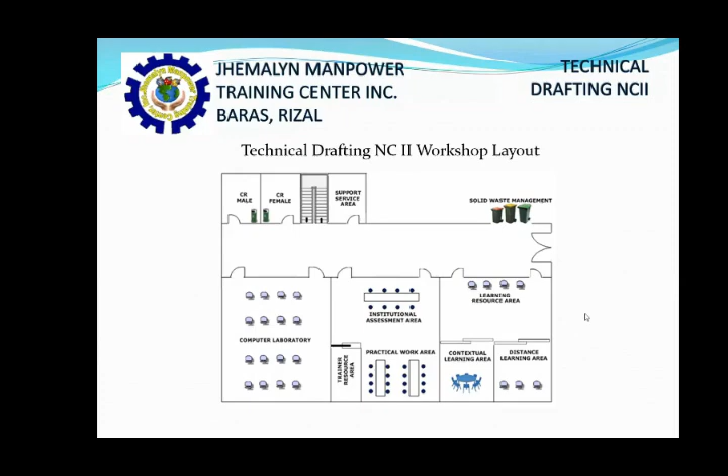At the end of the hallway is the learning resource area, where basically all the resources are, as well as the contextual learning area and the distance learning area for our knowledge-based learning.

So here under TESDA and Jhemalyn Manpower Training Center, as well as the Technical Drafting NC2 course, we use a training delivery of what we call competency-based training. It is an approach that focuses on the competency development of the learner as the result of the training.

So why do we use competency-based training? Because education and training must keep pace with the current technology and customer requirements. So under CBT, we have 10 principles.

Firstly, the training is based on the curriculum developed from the competency standards. So basically, everything that we're going to use or learn here is from what we call the competency standards written by TESDA. Next, learning is competency-based or modular in structure.

So basically, you will be learning one module at a time, and sometimes there are particular modules that have a prerequisite. So you have to be able to do or learn the previous module in order for you to move on to the next.

Number 3, training delivery is individualized and self-paced. Here at competency-based training, we believe the competency development of the learner as the result of the training should be individualized.

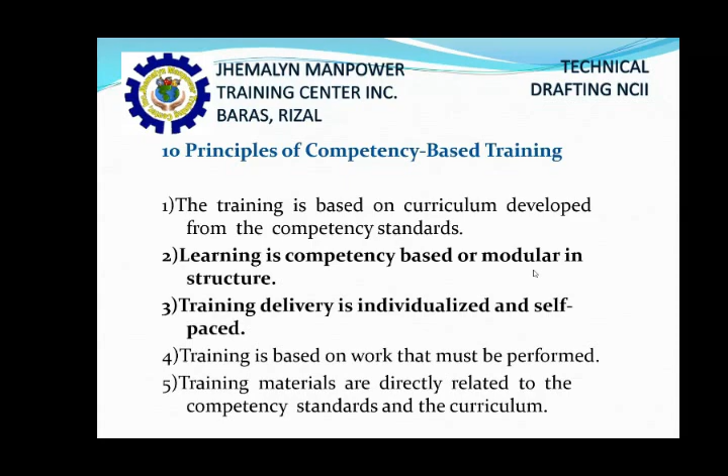So we will cover all of the competency standards that you will be needing in order for you to become competent on Technical Drafting NC2. Number 6, assessment of learners is based on the collection of evidences of work performance based on industry or organizational required standards.

So you will be assessed according to your personal development with regards to the training, the Technical Drafting NC2. You will be assessed based on your current work performance as well as your current development and competence with regards to the training.

Number 7, training is based on and off the job components. So basically, it will be better for you to have an industry immersion of what technical drafting NC2 really is about. Number 8, the system allows recognition of prior learning.

I will assume that some of you have previous learning or competence with regards to technical drafting NC2, especially since this course is divided into two very different aspects or styles on how to produce technical drafting drawings: how to do it manually and how to do it using computer-aided design.

Number 9, the system allows for learners to enter and exit programs at different times and levels and to receive an award for competencies attained at any point. This is in correlation with principle number 3, that the training is individualized and self-paced. Meaning to say, you will be receiving an award for competencies that you are deemed competent enough in, as well as there being flexibility in our training.

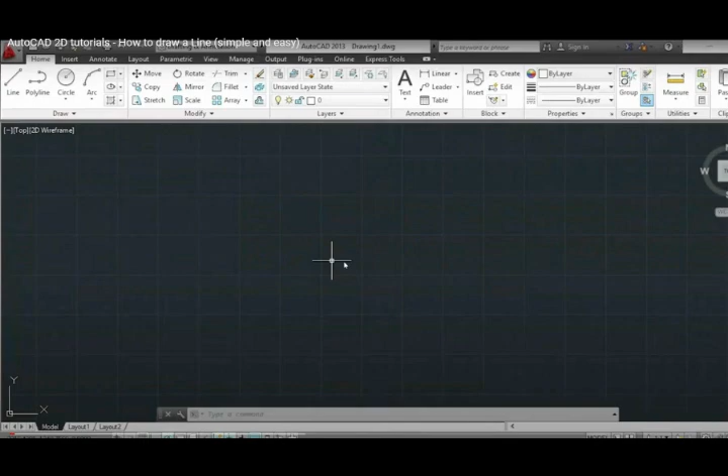Okay, so we will be continuing the presentation on drawing basic geometry. We will proceed on the lecture.

So first, let's draw a line. Remember that AutoCAD recognizes an object by its coordinates. There are three types of coordinates or axes in a three-dimensional setting: the x-axis, the y-axis, and the z-axis. You will be given 2 points on a 2D setting for you to be able

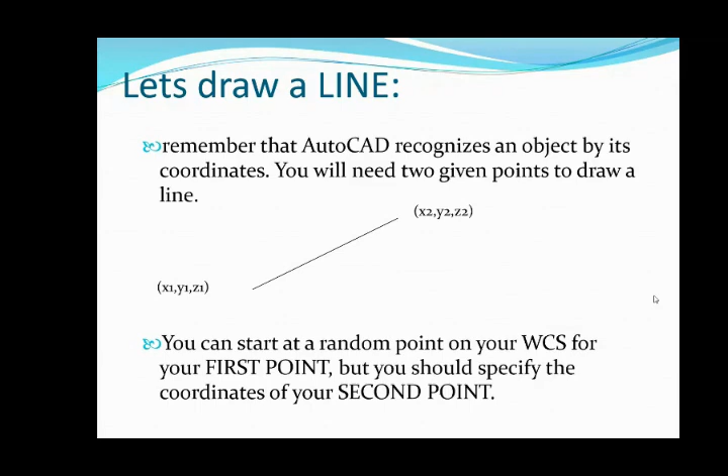to draw a line. So basically, a line is a distance between 2 points. You start a random point on your WCS for your first point, but you should specify the coordinates of your second point. You will type the line command on your command window, or you may click on the line icon on the draw toolbar, or select line on the draw menu.

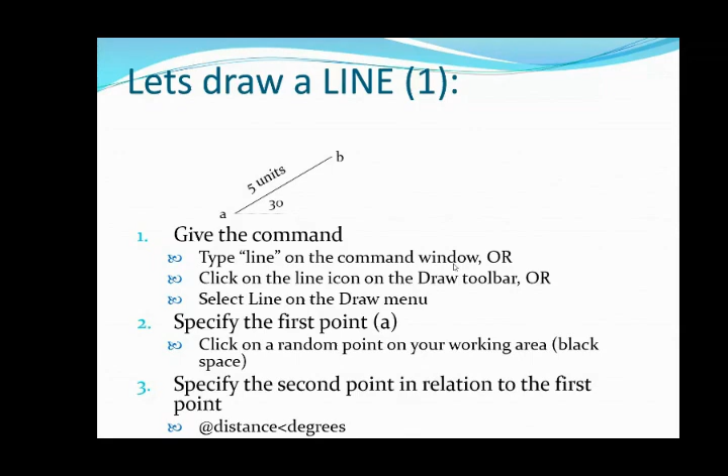Next is to specify the first point and the second point. If you want to do an orthographic line, which is restricted into horizontal and vertical, you have to hit F8, function 8, to have orthographic mode on.

You can give the command, specify the first point, and specify the distance between the 2 points, in relation to the first point. So if you want to do it 7 units, you have to type 7.

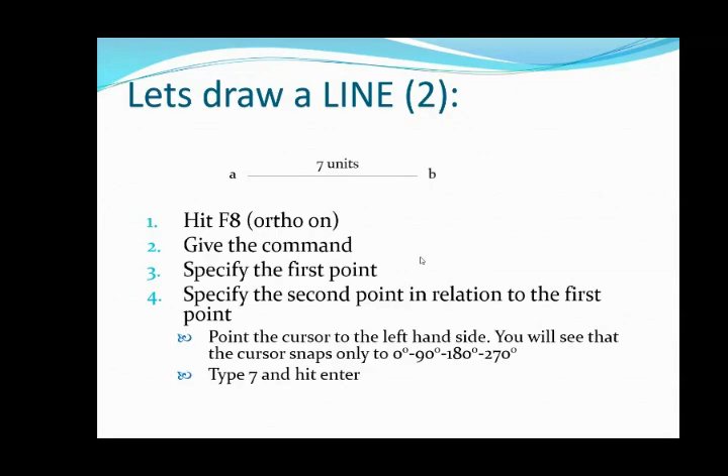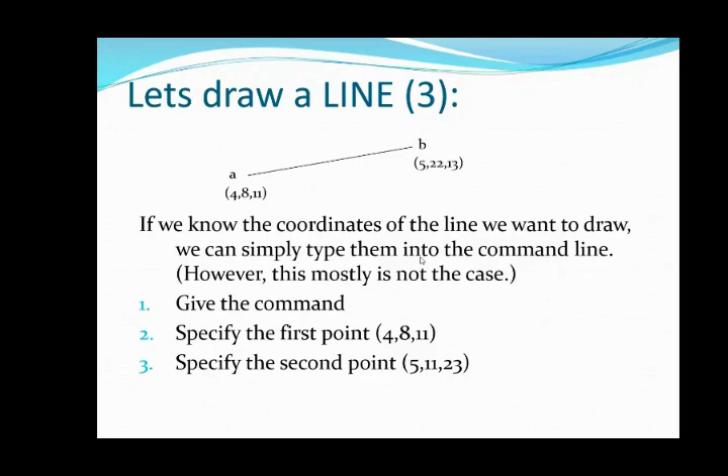If we know the coordinates of the line we want to draw, we can simply type into the command line. However, this mostly is not the case, so you will type the line command and specify the coordinates, like 4,8,11 and 5,11,23, for example.

Aside from line, we have different shapes or objects that we want to use in order to represent more in the drawing, because that's the very point of AutoCAD. Computer aided design and drafting is basically a representation of the actual manuals in order for you to design or build a building or a structure.

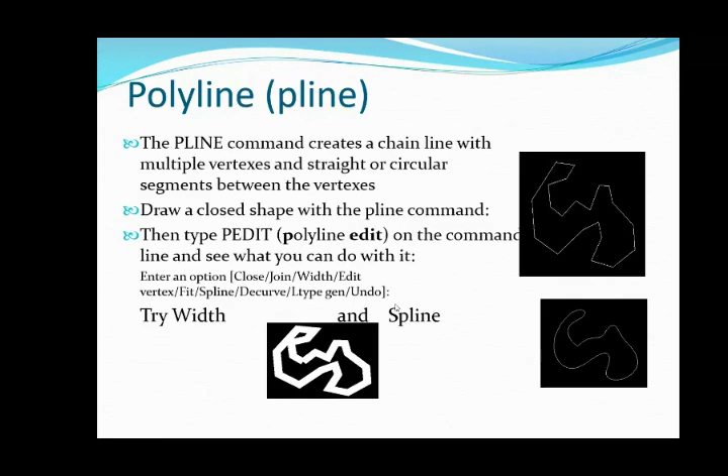ponds, pools, etc. Hatching is basically filling up a certain enclosed space. You may select what types of hatches an enclosed space or an object should have, since there are particular types of hatches for particular materials.

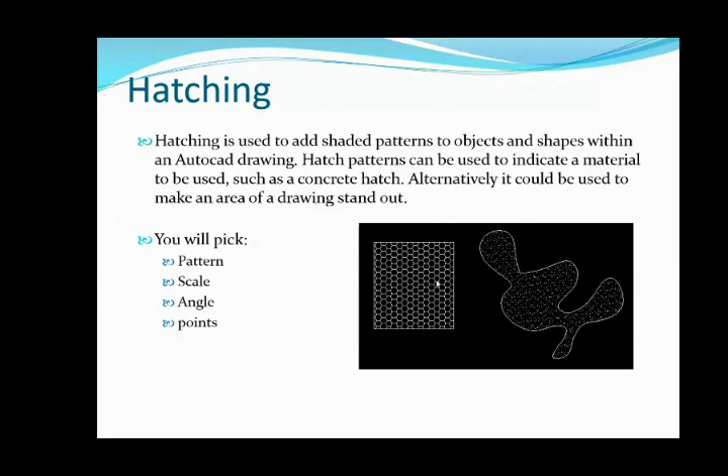So after that, our lecture is done. Next, I will be demonstrating how to do basic geometry using AutoCAD.

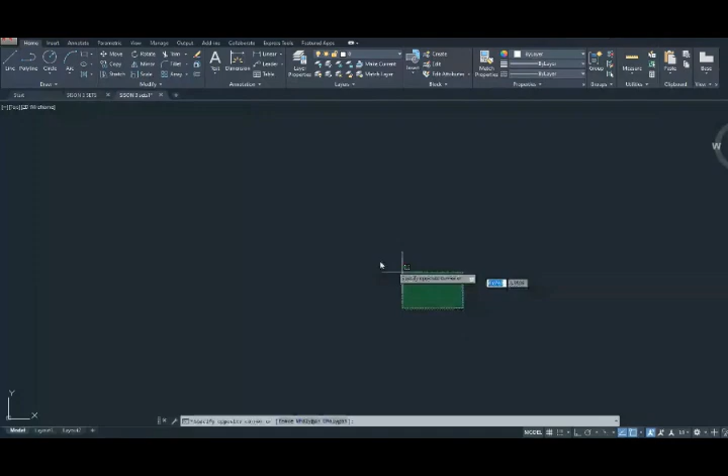Okay, the first now is to draw basic geometry. So if you are doing basic geometry, you will type L for line, specify the first point, and as you can see, it is now you can actually locate the second point anywhere.

But if you hit F8 for orthographic mode, you will be restricted to vertical and horizontal lines. So let's just say that here is the second point. So you basically draw a line.

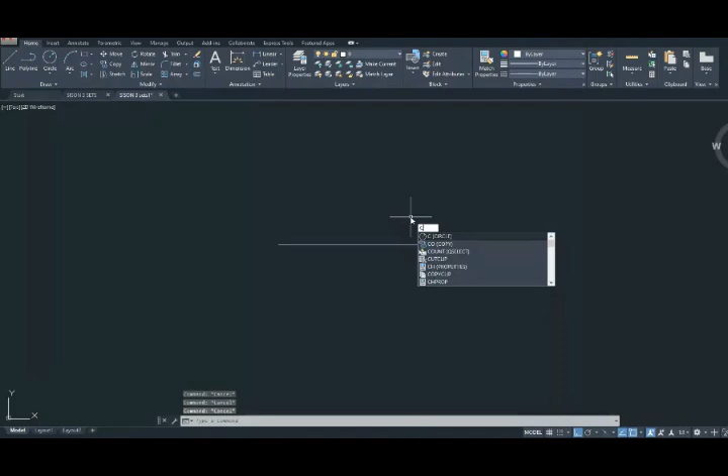So the next daw po is if you want to draw circles, you will type C for circle, specify the center point of the circle and the radius. So let's just say na yan.

So for rectangles naman daw, you should be able to identify the top left first corner point and the bottom right corner point of the shape. So you can also use polyline daw using PL.

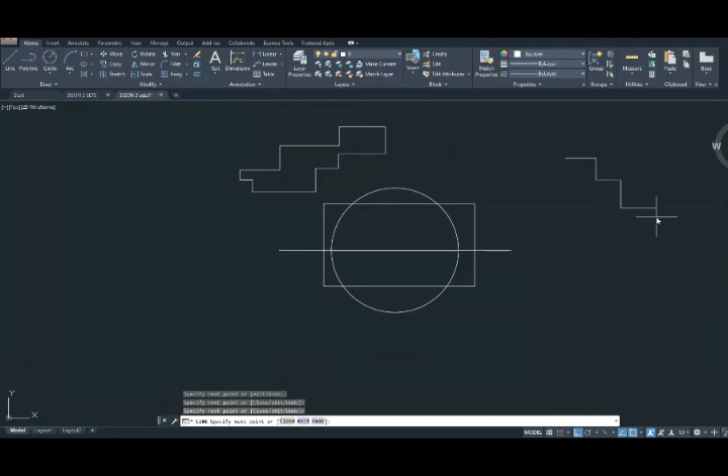So you can draw multiple lines that has only one representation or selection. Isa lang po ang kanyang selection. While if you do the line lang, for example, ayan, so it is separate. You may also join the lines in order for them to become polylines, and you may also explode, type X to explode the selection of those lines.

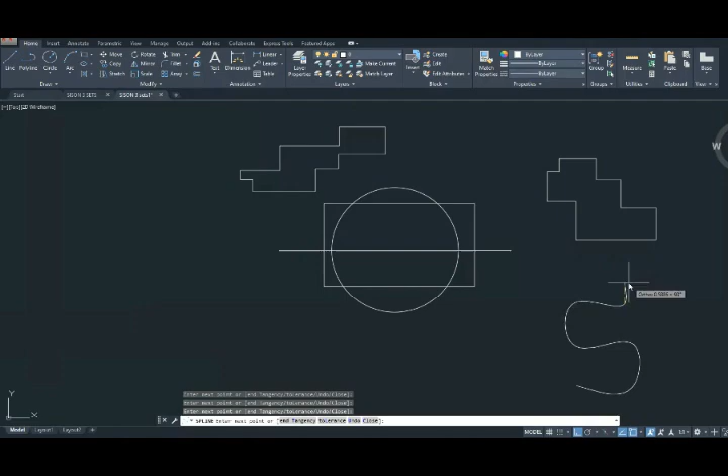Next is using spline naman, type SPL and specify the points. So yan po. For example, yan. Ay, sorry. Yan. Oh, sorry. Yan. So it is a polyline that is curved.

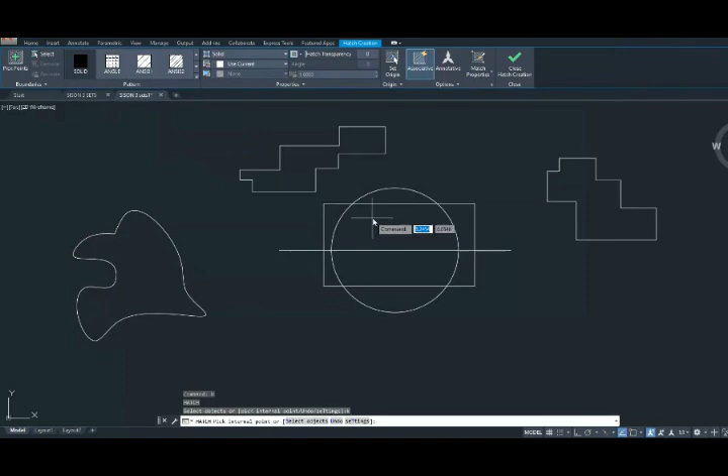So what else daw? Type H for hatches. So these are solid hatch. These are for tiles. Litan lang natin para makita. Yan. Yan. So for example, those are tiles. Pwede ring lines. These are for roof, bubong. Ganyan ang itsura ng top view ng bubong.

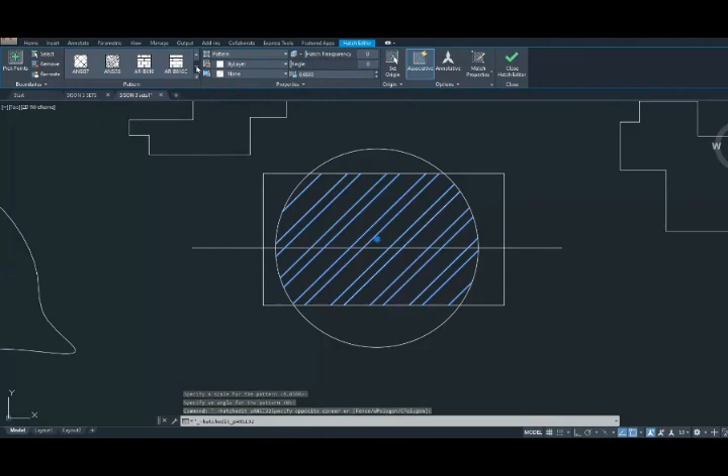Bricks. Oh, sorry. Bricks, ayan. Other types pa. Tiles, concrete, bricks uli, and etc.

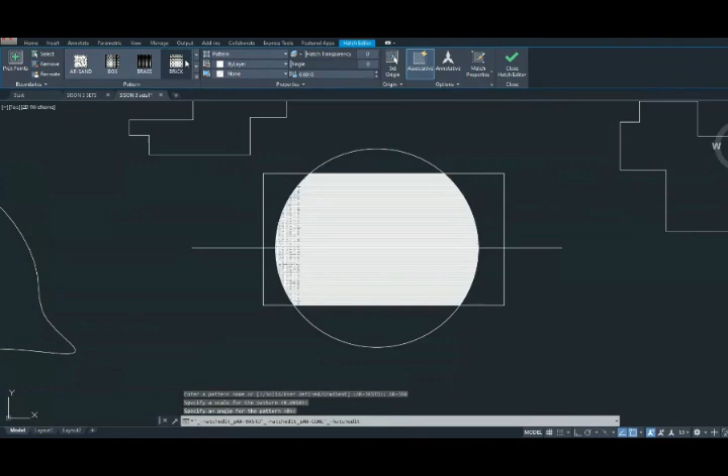So those are basic geometry using AutoCAD. Are you ready for the demonstration? Okay, if you are ready, you may proceed to the practical work area and do the demonstration.

So first, you have to draw a line down. Okay, good. Draw a circle. Okay. Draw a rectangle. Hatch. Okay, good.

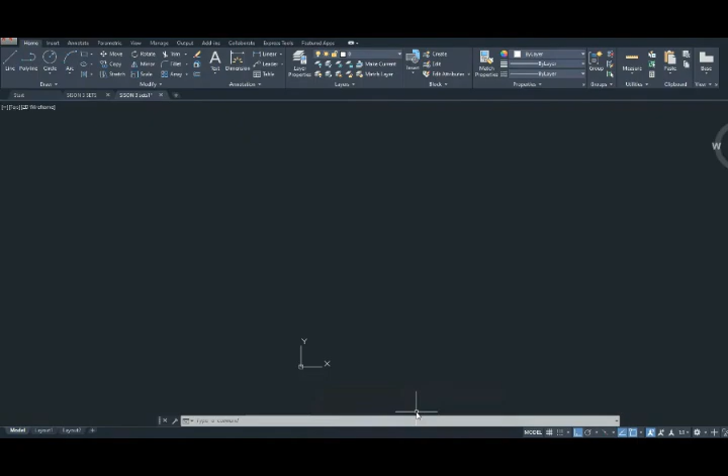According to your demonstration, you satisfactorily performed the task. There is a certain minimal discrepancy on the dimension requirement of those shapes, but nonetheless, you performed it well, and I can now consider you to undergo the institutional assessment for tomorrow. So congratulations, and be ready for an institutional assessment for tomorrow.